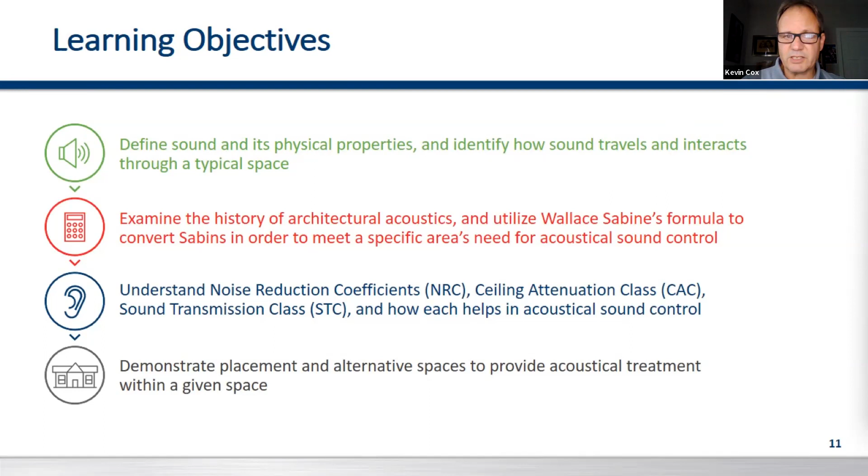We're going to look at noise reduction coefficient, ceiling attenuation class, and sound transmission class. And last but not least, we're going to look at the ABCs and demonstrate placement in alternative spaces to provide acoustical treatment within a given space.

Let's look at the characteristics of sound. What makes up sound? And start by doing a definition. So acoustics has a lot of connotations and a lot of meanings. That first one, a musical instrument without amplification, typically guitar, fun around the campfire, but really not the definition we're trying to drill down on today. Now, the branch of physics that's concerned with the properties of sound, that gets us a little closer. But for today's purposes, it's really the properties or qualities of a room or building that determine how sound is transmitted in it.

So sound or a sound incident is just that. It's a disturbance or turbulence that passes through a medium in the form of longitudinal waves from a source to a receiver, causing the sensation of hearing. Now, this medium doesn't have to be the atmosphere, like sound waves coming through your speakers and through the air. It can be a fluid, a gas. We know that sound waves travel more rapidly underwater, hence sonar.

This is going to age me, but when I was a kid, we had these wooden sticks. They were about 3 foot long. We called them a yardstick, and you could put one end of it in your ear and tap on it, and you would hear that sound within the wood before you would hear it any other place. And the reason is that sound travels more rapidly the denser the molecular composition of the medium it's traveling through.

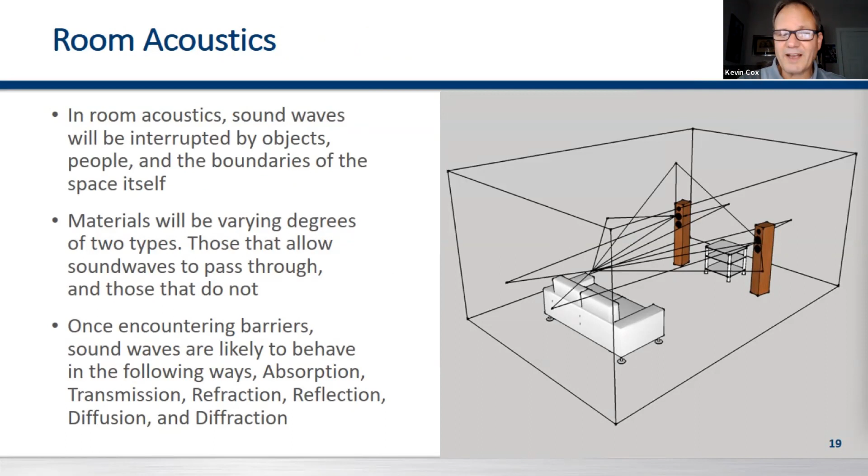Now, once encountering a barrier, sound waves are likely to behave in the following ways: absorption, transmission, refraction, reflection, diffusion, and diffraction. So absorption is basically when the sound hits an obstacle. Some of that energy is reflected back, as you can see, but some of it is lost molecularly or transferred into the barrier itself. That lost energy is said to be absorbed. Now, the sound wave itself, thickness, porosity, hardness of a material, are all going to affect the amount of absorption of that obstruction.

Transmission. This occurs when a sound wave is carried through an obstacle, through vibration, and re-emitted on the other side. So we know that some of it's absorbed, but anything we can hear on the other side, in this case it looks like a partition, we say is transmitted through that obstruction. Now, these can be airborne, structure-borne, impact-borne, but anytime you can hear a sound move from one side to the other, that's considered a transmitted sound.

Now, refraction is a variation of transmission. That's the bending of a sound wave, kind of the turning either up or down, depending on the angle and the sound incident itself, and the different compositions within that obstruction. In room acoustics, we really don't have a lot of ways of controlling or preventing this, but it is a phenomenon that happens, so we did want to include it in our presentation today.

Reflection. This occurs when the wavelength of the sound is smaller than the obstruction it's hitting. Sound waves hit every side of a room and start to bounce back until the sound energy is reduced to 0. Now, diffusion: we know that usually when a sound wave hits a flat obstruction at whatever angle, it's going to be about a mirror image between its primary ray and its secondary ray. However, there's a splaying of those rays, especially off a flat surface, and we call that diffusion, and this is another way that sound energy dissipates itself to 0.

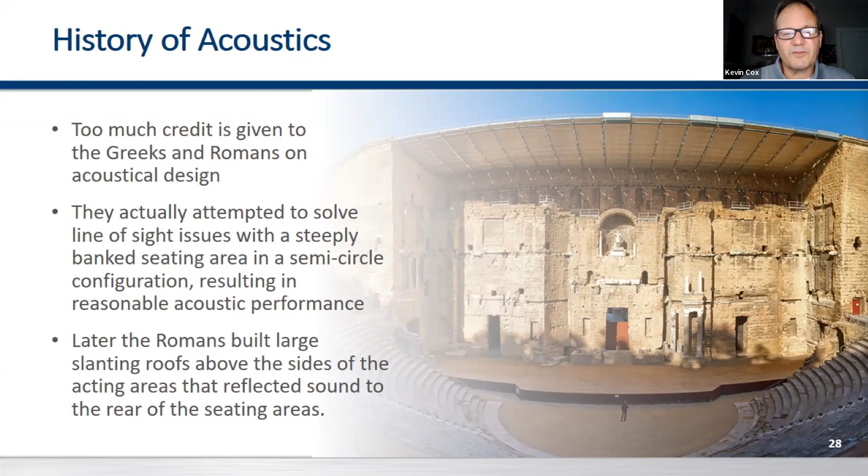Later on, the Romans built large slanting roofs that were shading devices. And once again, by mistake, they pushed waves back out into the farther spaces of the auditorium, creating some of the first reflectors. There really isn't any reference of architectural acoustics until the 1st century BC by Vitruvius in a book called De Architecture, where he describes echeia. Very much like the acoustic guitar that has a resonance chamber, these large vases were placed around the outsides of auditoriums, and that resonance chamber would give some reverberation, some richness of sound, because there was no reverberation. These sounds were just single pass and moving out.

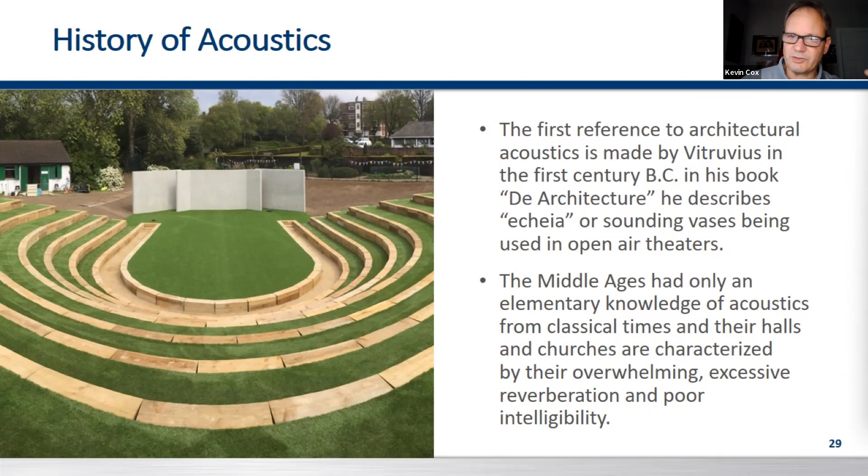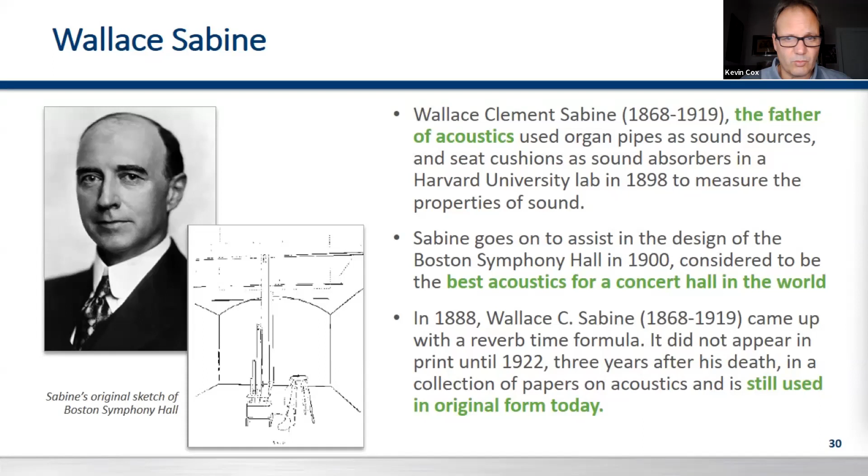So Sabine was able to determine through the experiment with these cushions and these organ pipes a definitive relationship between the quality of acoustics, the size or volume of a chamber, the amount of absorption, with the most important factor being reverberation time. Now we know from previous slides that sound produced in a space will bounce off and reflect, gradually losing energy. As these sounds collide with each other, the phenomenon is known as reverberation.

Now, too much reverberation is going to have a negative impact on speech intelligibility, and too little will reduce the warm, rich sounds that we normally hear, like in an orchestra hall or like in the Boston Symphony Hall. So Sabine's formula was RT60, or reverberation time 60 dB. And basically what it's measuring is a 60 decibel drop in sound incidence, and what that time is in seconds. So in this example, it's 100 to 40.

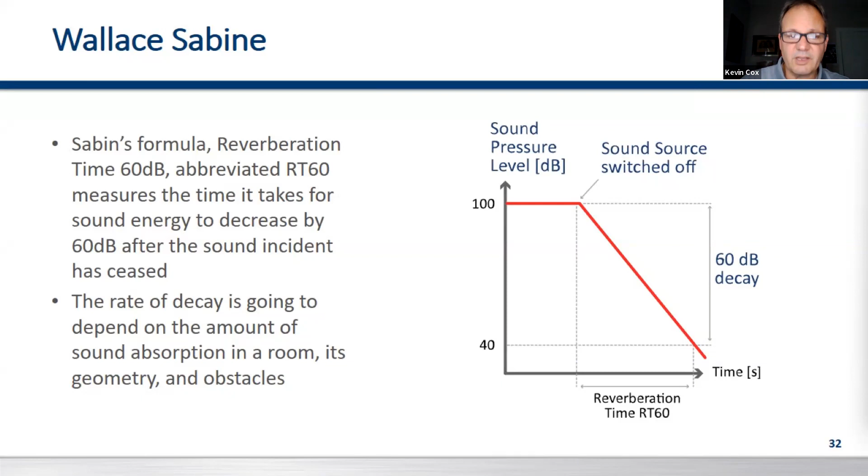It doesn't have to be 100 to 40. It could be 120 to 60. It could be 90 to 30. My math's a little off. But it's basically the time it takes for a 60 decibel decay to occur, and that time in seconds. That rate of decay is going to depend on the amount of sound absorption, the sound incident, the room geometry, and the obstacles that are in that room.

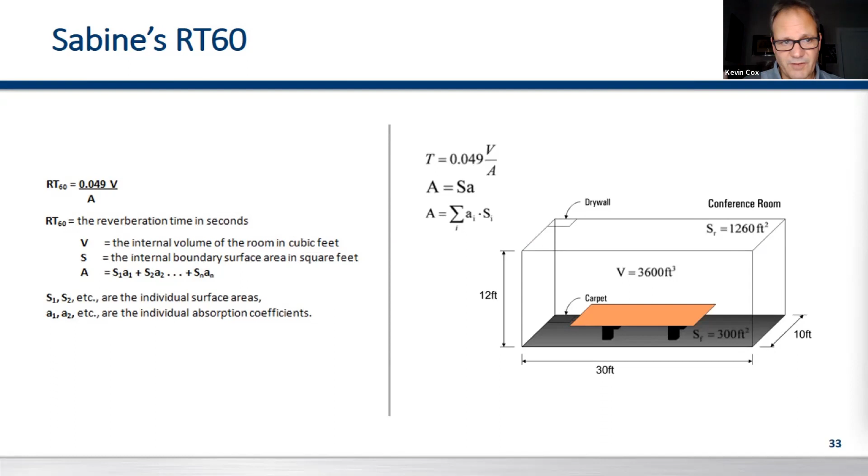Now, different building materials will have varying amounts of acoustical absorption. If we're treating a space, the higher the absorption, the less footage will be needed. But because of the algebraic relationship, we can remove one variable. So when we looked at that model before, we were trying to model a room's RT60, what it was going to be in seconds. But if we know the RT60 that we want to get to, and we know the volume of the space and the size of the walls, we can figure out that absorption coefficient, or how much absorption is going to be needed to treat that space in Sabins.

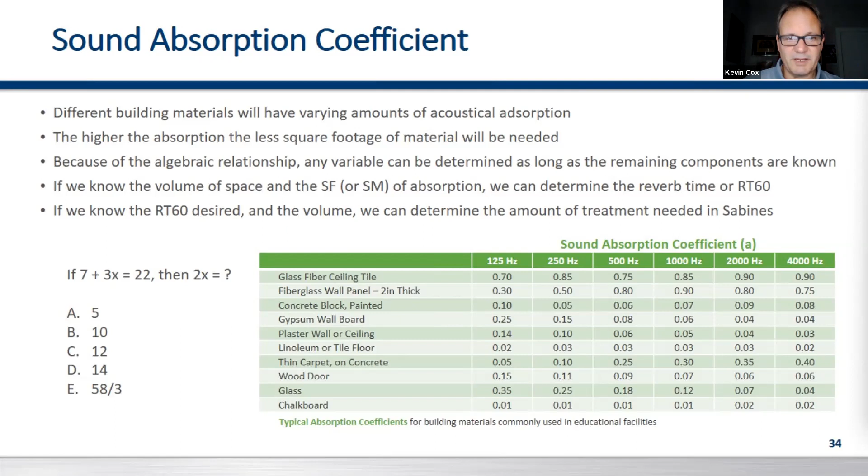Now, generally speaking, for general purpose, a 1.5 to a 2.5 second RT60 is about what we're looking for. Larger auditoriums, it's going to be a little higher than that. Smaller spaces, education spaces, libraries, medical, probably a little less. When I worked in another lifetime for USG, they had an anechoic testing chamber with all these foam things coming off the walls, and you would go in there to test a sample, and it was almost like you were holding a shell to your ear, because you could hear the blood rushing in your head. It became uncomfortable. It was so devoid of sound, so acoustically dead.

The other side of that is when you get to 3.5 seconds, you get a lot of echoic effect, a lot of reverberation. You get to 5.5 seconds, you really start to lose speech intelligibility. There's kind of a bit of a communication breakdown because it's so echoic, and so forth and so on. Well, God bless the internet.

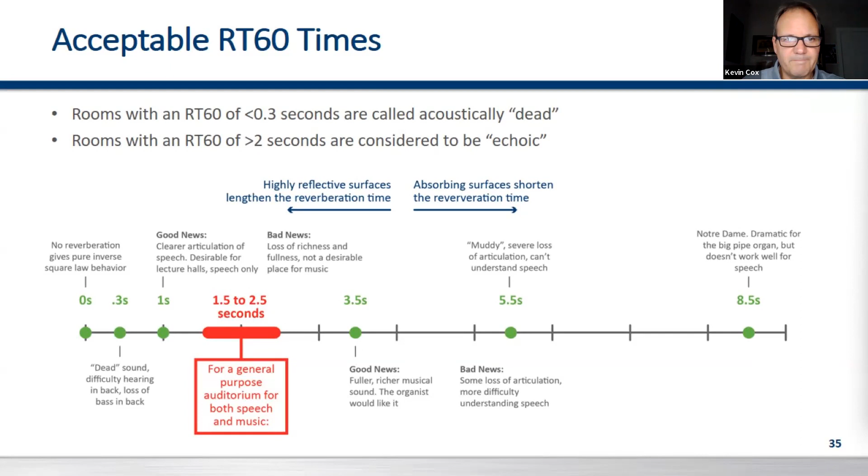This is public domain, so anyone can use one of these, but there's a lot of reverberation calculators you can use. You can see the width times height times length to get that volume in feet or meters. Your walls, floor and ceiling, what those spaces are, and then a number of hertz that you can test across, and this will give you a modeled RT60. It's kind of an acoustician in a jar, or you can work it backwards if you want to see how much treatment a room needs.

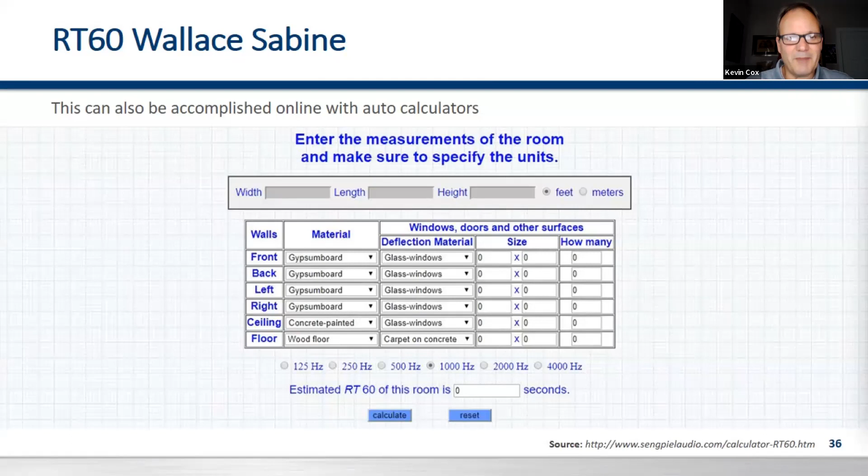And once again, these are the hertz across the room. The voice hertz are that 125 to 250 range, if that's what you're working with. But these are all over the place. And like I said, they are public domain, so you're not doing any copyright infringement by using them if you wanted to model spaces. So we looked at these spaces and how they react.

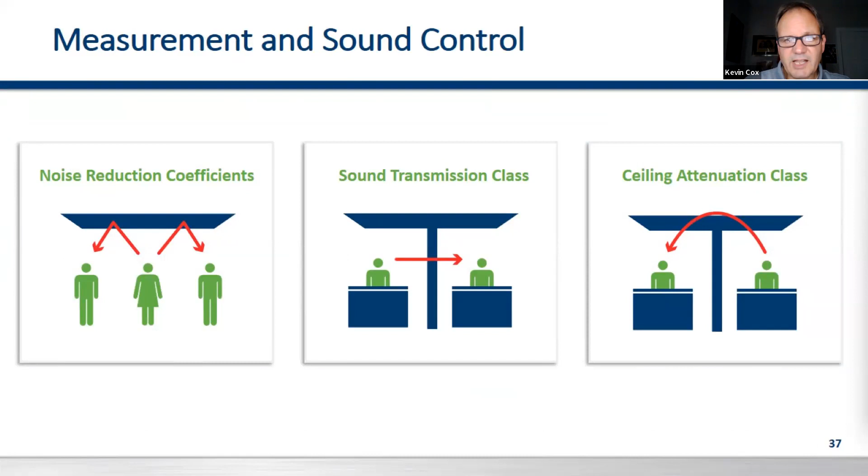And now let's look at materials. More specifically, noise reduction coefficient, sound transmission class, and ceiling attenuation class. And we're going to take those in order. First is noise reduction coefficient.

Anyone that's opened up an acoustical ceiling catalog or acoustical wall panel catalog has definitely seen NRC, or noise reduction coefficient. And what that is, is a scalar representation of the amount of sound energy absorbed as soon as the sound incident strikes a surface. It's represented by a decimal or percentage, and it's rounded to the nearest 0.05. So an NRC of 0 would indicate a perfect reflector or perfect reflection. An NRC of 1 would represent perfect absorption, or 100% of that sound energy upon first pass is being absorbed.

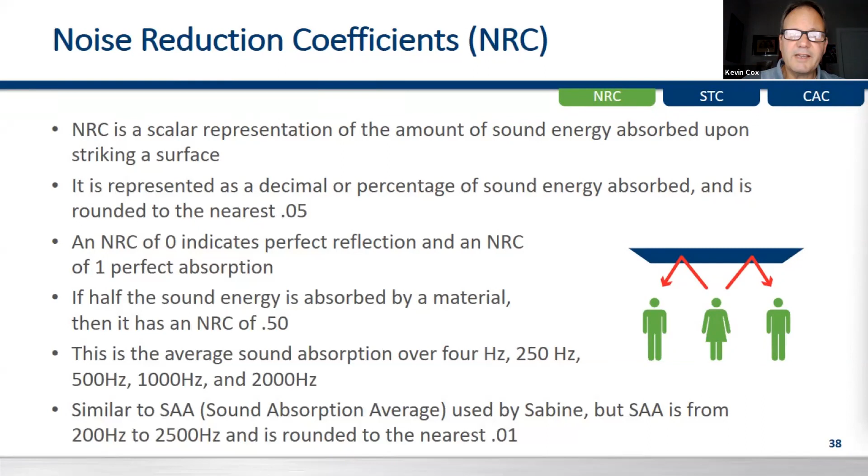If we had something with an NRC of 0.50, that would mean that 50% or half the sound energy is being absorbed upon first pass. This is averaged across 4 hertz: 250, 500, 1000, and 2000. And once again, it's rounded to the nearest 0.05. We do have a sound absorption average in that anechoic chamber. They were drilling down to get a more exact reading, and it was an SAA. It's very similar to an NRC, except it's a wider band of hertz. It starts at 200 and goes to 2500. And instead of being rounded to the nearest 0.05, it's rounded to the nearest 0.01.

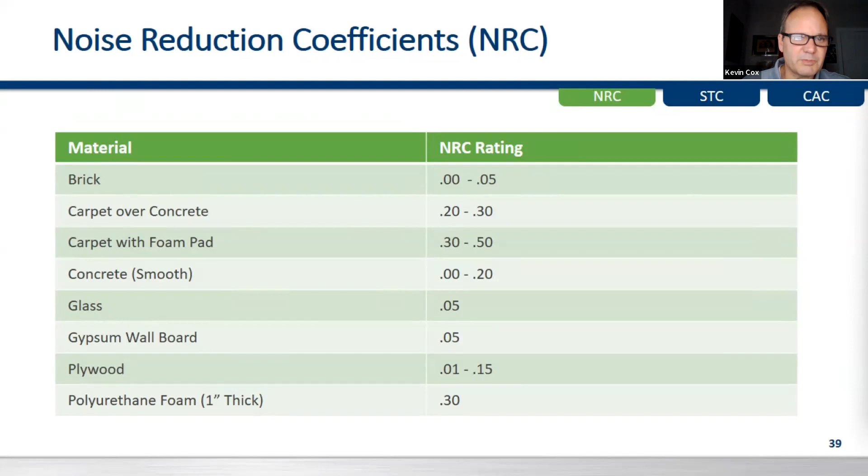So next is sound transmission class. So we know about transmission of sound passing through an obstruction, and what STC measures is the reduction of decibels from one side of an obstruction to the other. Now the word deci is meaning base 10. So 10 dB up or down is a physical and literal halving or doubling of the sound wave itself. And then the last part is by its inventor, Alexander Graham Bell. And Bell was actually involved so much in sound because he was going deaf, and that's why he wound up with the telephone and the phonograph, and you guessed it, the decibel.

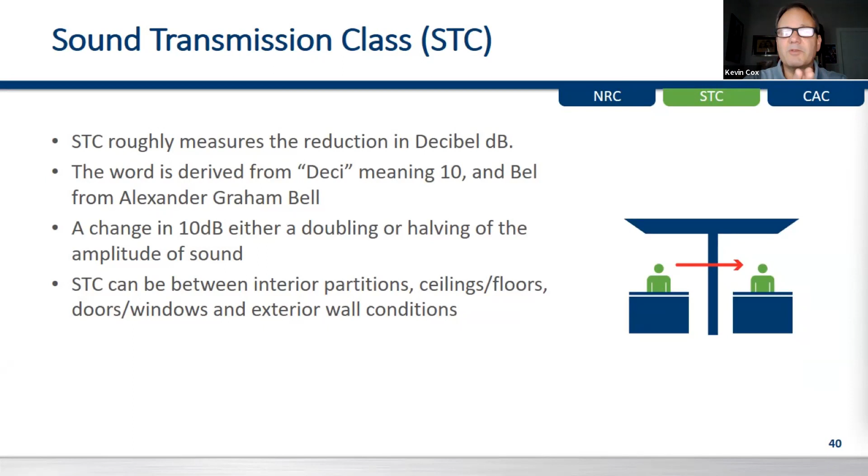As you get higher and higher, it becomes more cost prohibitive and a little trickier to get something that's close to soundproof, but it's not impossible. But those ranges run roughly from a 25 where sound is passing through pretty readily to 75 and 80 where you're getting something that is almost soundproof. And that's sound transmission class.

Last but not least, the ceiling attenuation class. It's essentially STC, and this came to us from the Acoustical Ceiling Manufacturers Association, CISCA and some of those. But it's basically the same measurement. It's the decibel drop, but it's a 2-pass test. With the advent of walls not going to ceilings, going grid to floor instead of slab to slab, and open offices, there was a loss of privacy. So what this measures is the decibel level on one side, going up, hitting whatever that structure is above, and being measured in its adjacent space.

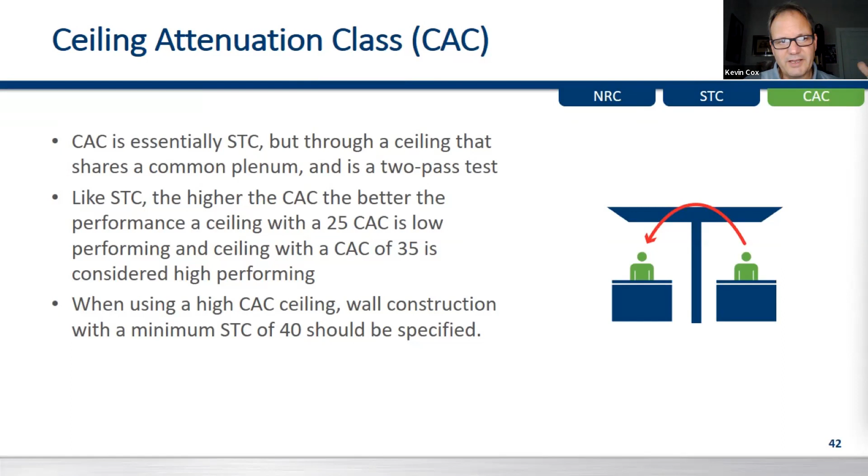And once again, if you have a 60 decibel incident on one side and you measure a 20 on the other side, then you're going to have a ceiling attenuation class of 40. And that would be very, very high performing. So this is also a very tight measurement like STC, where 25 is low and 35 is high. The one thing we want to know is that if we are specifying a higher CAC ceiling, we want to make sure that the wall specification is going to be at least 40 plus. You don't want to spend money in the ceiling piece if you're going to lose that sound privacy through the walls. And then there's a quick kind of guide on the side, showing the CAC going up and over, the STC passing through the wall, and then the NRC being absorbed up into the ceiling.

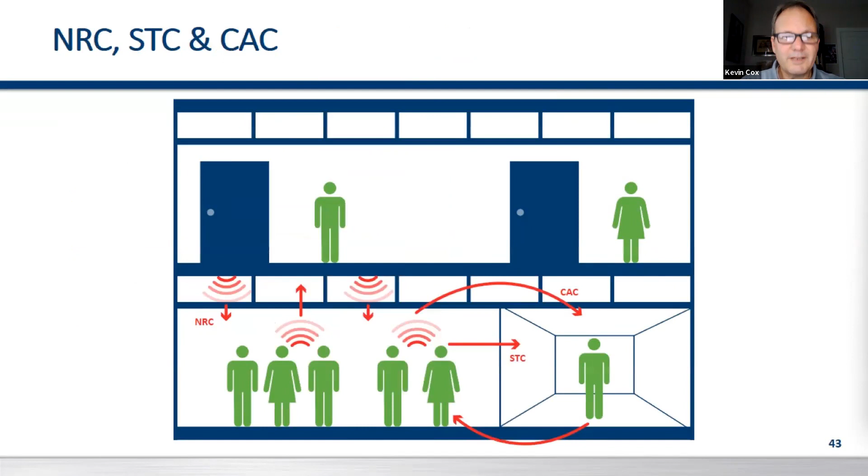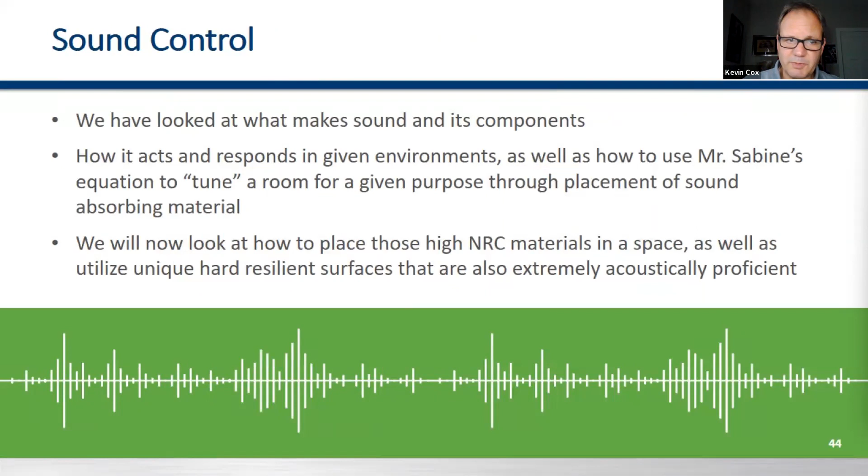We looked at sound control and its components, what makes it up, how it interacts within a given room, and how to use Sabine's equation to literally tune a room for a given purpose. Now we're going to look at the ABCs and how to place these high NRC materials in spaces, as well as unique, resilient hard surfaces that are also acoustically proficient.

So I mentioned earlier acoustic ceiling tile. Acoustic ceiling tile has really been the go-to for decades. Very, very easy, very, very convenient. It's actually made from a byproduct of slag. The tiles themselves are mineral fiber. So they'll take the slag and spin it like glass, like fiberglass, into these long fibers, press that into a mat, paint it with an acoustically transparent paint, and then perforate it and fissure it so there's places for the sound to go to, for it to get caught in.

And it's very, very simple to install. It creates this nice plane and interstitial space for all the MEP trades to be accessed and yet hidden out of sight, usually 2x2, 2x4. And if you have a space where your ceiling height is 8-9 feet, just treating one plane with acoustical ceiling tile is usually enough to control reverberation.

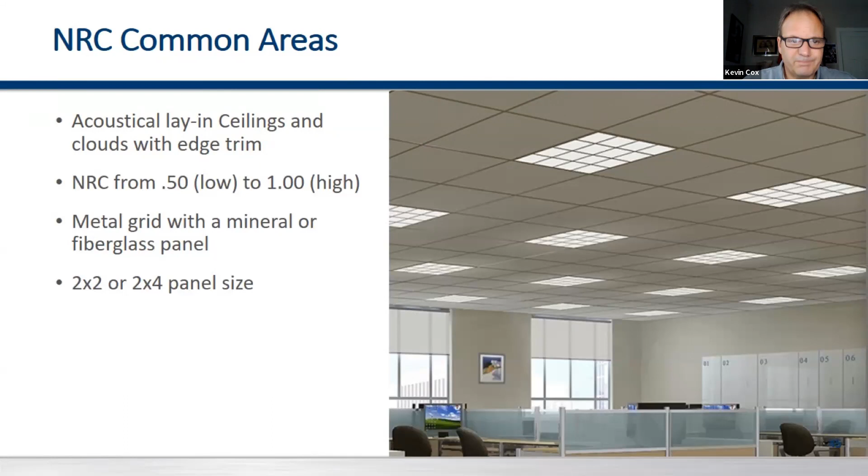Now, if we want to get a little bit more flexibility, we can work with geometry, with shapes, with textures, with colors. Floating clouds or fabric wrapped sound panels. The nice thing about sound panels, these are usually chemically hardened edges. They're wrapped on one side, the visual side, but they're absorptive on both sides. So what that means is that you can use less panels and still get a 2-pass effect. Unlike the ceiling attenuation class where you're measuring the decibel, we're actually getting absorbed in the top.

So you get that first pass coming up. Then anything that goes off of structure and bounces down, you can count on getting caught on a second pass on the backside. So what that means from the design perspective is that we can use less material and still get the same amount of absorption because we're getting that 2-pass effect.

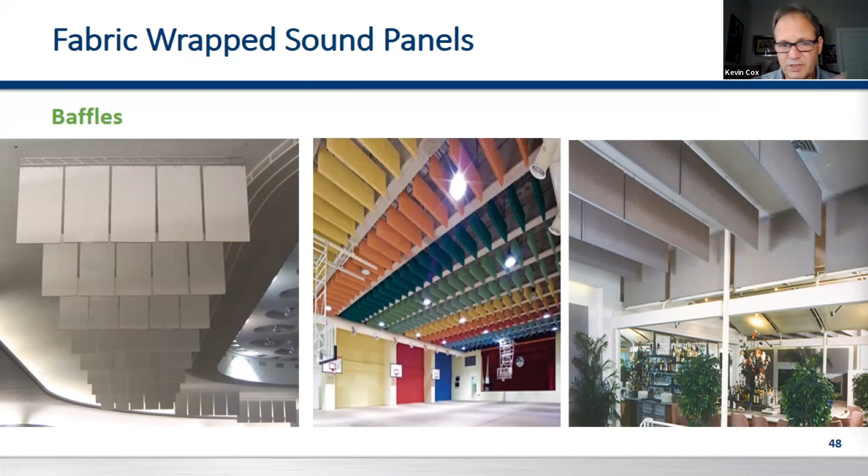One of the rules of thumb with baffles or banners is however deep they are, however long that drop is, is generally what we want to space them at. So if you have a top banner and it is closer than the drop, you're really not going to be utilizing the top part of that absorption. If we spread them out and get them farther, then we're not utilizing the square footage within the space. So we're circling back around.

So acoustical ceiling tile in its basic form, this fissured and perforated pattern, is pretty cost effective. But once you move away from that standard perforation, if you want to get a larger monolithic or smooth surface, prices double or triple. So your upfront cost goes up exponentially. They can stain, break, fade over time. Generally speaking, the mineral fiber versions have a maximum range of 70 to 80 NRC. To get higher than that, you'd have to go to spun fiberglass.

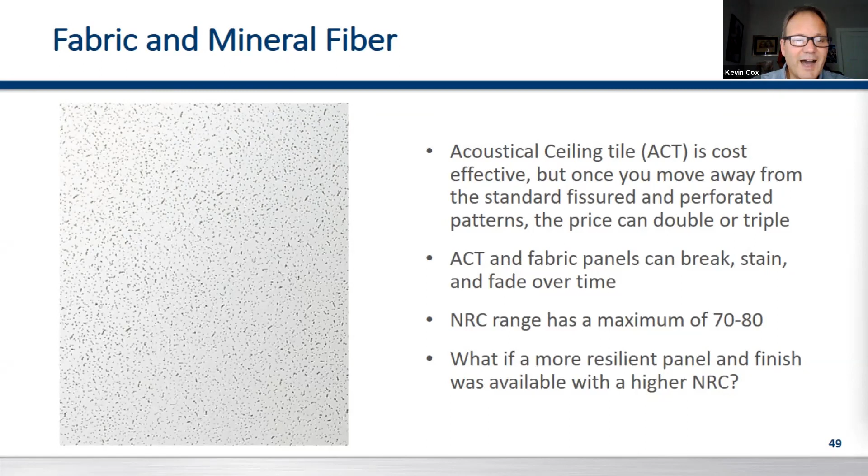So, what if there was a more resilient panel and finish that was available with even a higher NRC? Well, I know this is going to come as a shock to everybody, but the metal guy is touting perforated metal acoustical panels. It does seem a little counterintuitive because a solid metal panel will reflect sound. However, a perforated or micro perforated panel allows sound to transfer through. Now, once we transfer through, we need to catch it on the other side. But by doing so, we can create a very, very resilient surface with a very high, almost perfect NRC.

So like I mentioned, the ABCs of acoustics. So when I say ABCs, what exactly am I talking about? Well, with metal, there's absorption, there's blocking, and there's covering. So like I mentioned, we can perforate metal panels and allow sound to transfer through, but then we need to catch it with something. One of the ways that we can do that is with acoustical fleece or SoundTex.

In a lot of these, when I do these architecturally, they don't want you to mention product names. The thing is, the only people that really make an effective acoustical fleece is Freudenberg, and it's called SoundTex. It's very much like Kleenex or Coke. The product name has become synonymous with the actual acoustical fleece, because it's used interchangeably, because they're really the only one.

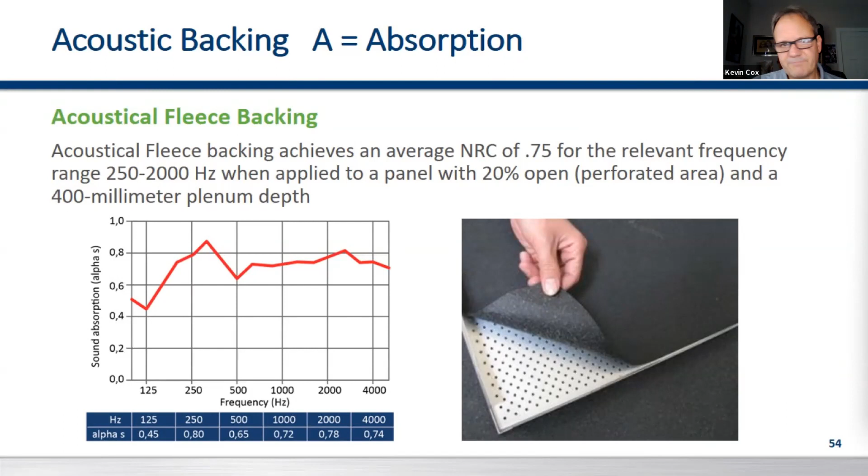Now, that's not perfect absorption, but you're not giving up any of that interstitial space by using an acoustical fleece. It doesn't particulate. You don't have to worry if you're ever going to turn any of these sideways about it falling out, because it is adhered to the panel. You're getting some very, very good acoustical performance without utilizing or losing any space that you're utilizing for duct work, for communication, for electrical, and so on.

This is a product I like a lot. This is CFAB, or cellulose fiber acoustical bat. It is highly recycled and highly recyclable, in a 2x2 or 2x4 or 4x8 kind of semi-rigid. And what it is, it's actually recycled denim and polyester. So it seems like it's a flashback from the 70s, but they treat it in such a way that it passes NFPA 285. So it's suitable Class A for all commercial building.

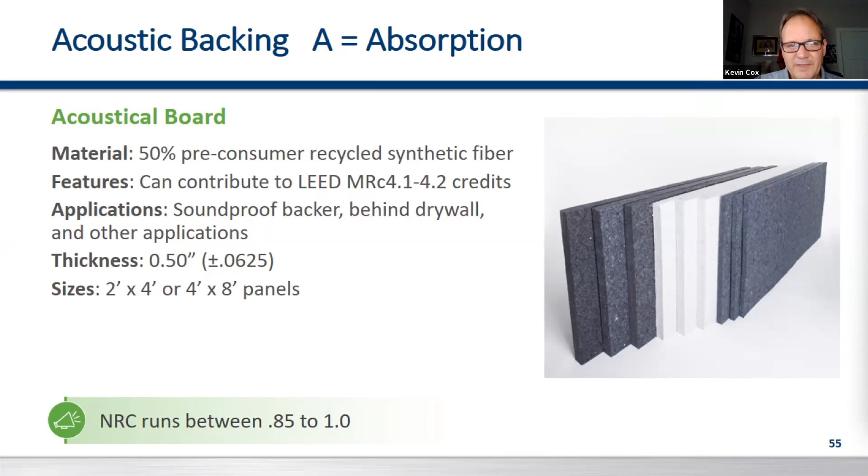If you get a 2-inch, you're pretty well insured to get a 0.85 to a 1.0 NRC, depending on how much perforation you have on the metal face. And also, it's not an irritant. So when people are installing these, touching these, you can touch your face. It's not an irritant like fiberglass. You don't get all itchy and sweaty or break out in hives. And it's also a very, very green product and very planet friendly. So that's CFAB.

The most common, our good friend fiberglass, usually a very bright color, yellow or pink, depending on the manufacturer. So we have to encapsulate it or put some type of scrim or felt or black facing in front of it so you don't see the color through the perforations. Most commonly, it's a 1.5 to 2-inch density. You can still get a pretty high NRC, 0.85 to 1.0, but it is an irritant. And it does not recycle well. And once it gets wet or collects humidity, it loses its acoustical performance. However, it's extremely cost effective. So it is widely used throughout the industry for acoustic backing to get that A, or absorption.

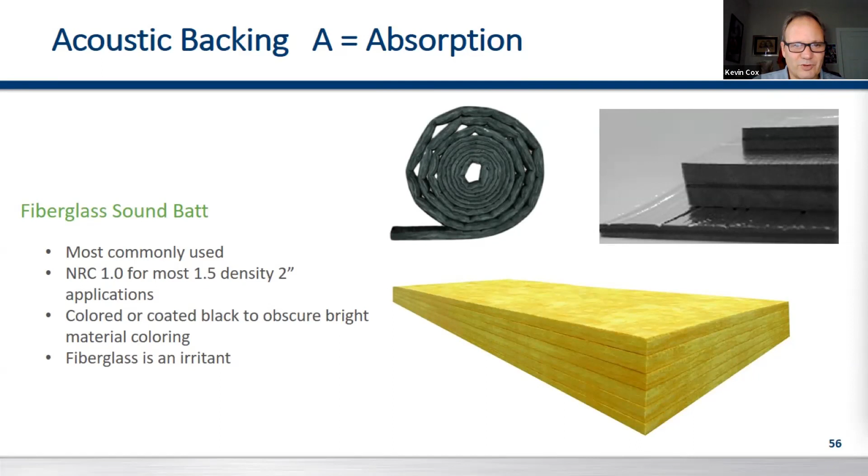If you've ever had anybody that has a champagne taste and a beer budget, another way to drill down on something where you can get acoustical performance is by the use of acoustical duct liner. Now, this is still basically fiberglass, but pressed. However, because they don't call it an acoustical batt and they use it in large duct trunks to reduce wind velocity, it's very, very cost effective.

It comes in basically 100-foot or 50-foot rolls. They're the same size. It just depends whether you're rolling out 1-inch or 2-inch. It is generally a 1.5 density per cubic foot, and it already has that black facing on it. So once again, you're not going to be able to see it looking through the perforations when we're looking up or down on an assembly or through it on a wall assembly.

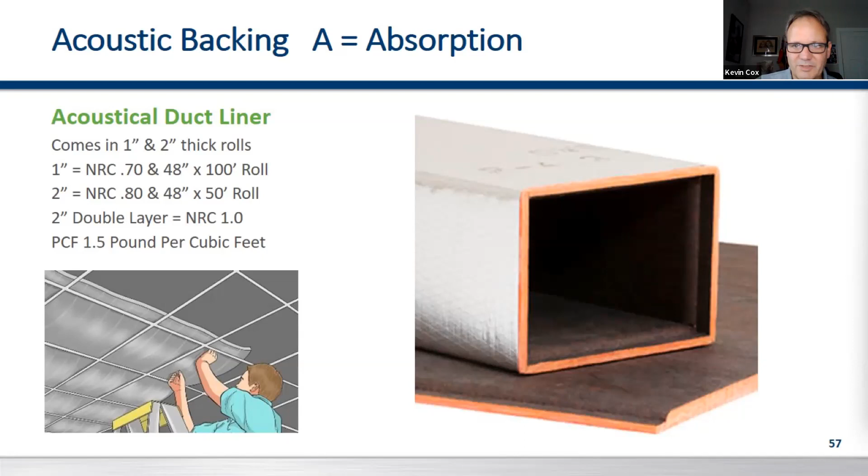So anything you can do with a mineral fiber panel, we can do with aluminum. The reason I say aluminum, certainly we can do it with steel, but perforating aluminum, it doesn't rust, it doesn't corrode. We don't have any issues with that. And also aluminum, as far as being planet friendly, is one of the most green materials we have. This is true because it's more cost effective to actually recycle aluminum than to go out and try to get bauxite to mine virgin material.

So mineral fiber, although it's made from a recycled material, at the end of the day, they really don't have a good way. They grind some of it up and try to reintroduce it into some of the slurries, but it doesn't really take. More often than not, the reality is that when this mineral fiber is done, it's going to wind up in a landfill. It's expensive to try to recycle it, and the processes aren't quite there yet.

However, when we're looking at metal or aluminum, it's more cost effective. So that aluminum has a value. The idea that someone's going to go in there, pull it down, and recycle it is a very high probability because it's more profitable to do so. So it's one of the few places that capitalism actually drives a little bit of green building, which is kind of a nice effect for it.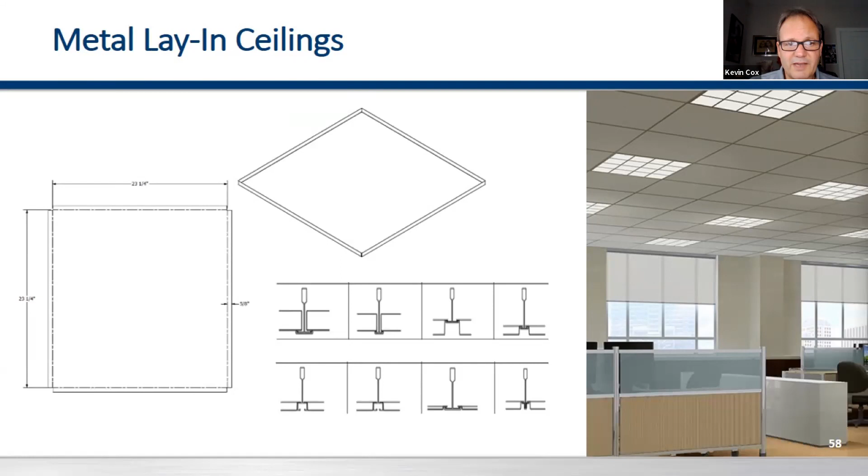But once again, any of the bolt slots, the reveal edges, the square edges, narrow line, just simple lay-in, anything you can do with a mineral fiber panel, we can do with an aluminum panel perforated, and we're going to get a higher performance out of it.

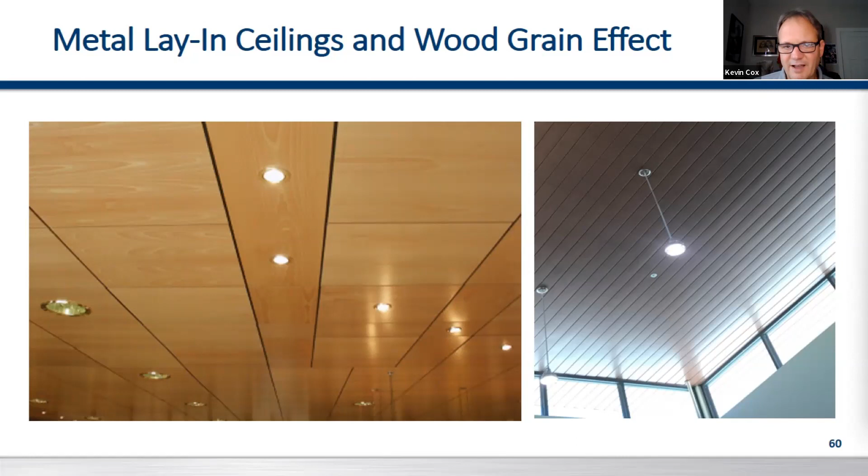So we can carry these through ceilings, through walls. This is solid panels. On the right side, though, is micro perforated with Soundtex. So they can be acoustical units, or they can be simply just eye-catching, warmth-bringing type units that, once again, we still get all the benefit of recyclability, of second use, second life, and the look of natural woods.

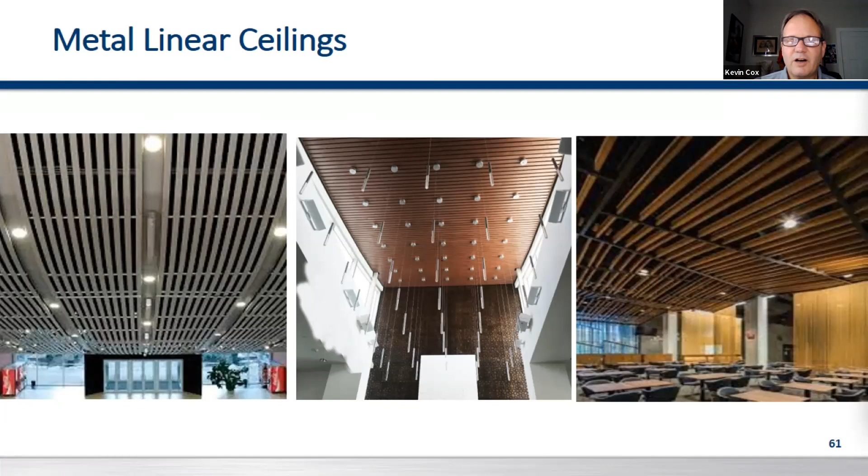Linear metals, they don't really do this in mineral fiber. This is something that's specific to metals. It used to be very, very popular, 60s, 70s, 80s, 90s to some degree, kind of lost favor. But once again, with the advent of faux wood finishes and wood surfaces, linear metal has come back as a very, very viable solution, as have metal baffles and beams with the wood look that you see over on the right. So we have that kind of warm, natural feel in the center, a very neo-industrial look on our left, and then a split look beams and baffles on our right, all done with 032 aluminum.

Not to mention metallic finishes, mill finishes, coateds. We can work with zincs where we grow an anodic layer. We actually grow crystalline on the surface of the panel itself. It's not a coating, so there's no chance of it delaminating or coming off. Coppers, bronzes, natural metals, zincs, very, very popular, both interior and exterior today. So as we delve into metals, or metal panels for interiors, your options are pretty unlimited.

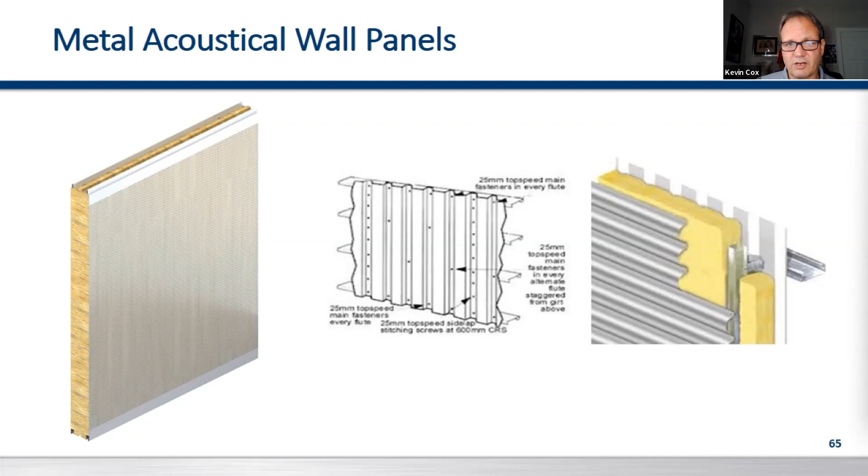So wall panels, we can hook them on the walls. We can make entire walls by just creating a girt and keeping the cladding off an inch or two, putting some type of absorber behind that. We've looked at absorbers, a CFAB, a regular fiberglass, spun glass insulation, or Soundtex. Any one of those is acceptable. And literally you can make all of your walls absorptive if need be, if you have that type of volume and want that type of sound control or RT60 calculation under a second or so in your space. These can be modular. Once again, with the modular pieces, we can work with geometry, shapes, colors, texture, giving you all types of flexibility simply by using metals.

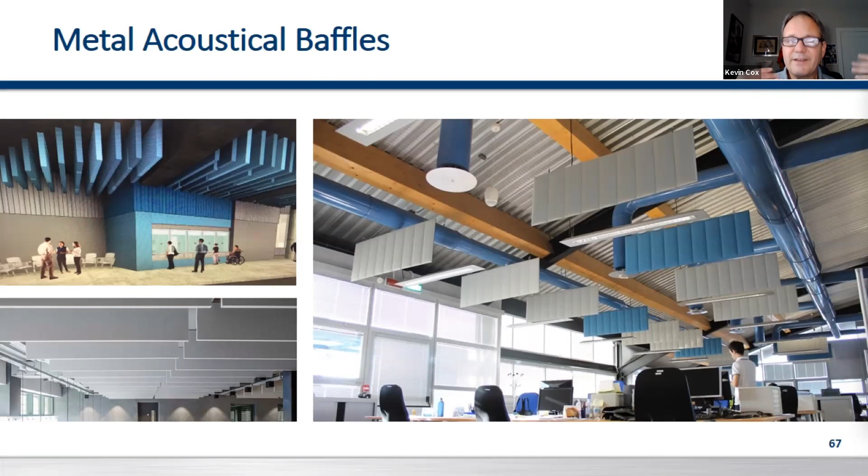Baffles, very simply, we can do the same things that you can do with all the fabric wrapped or chemically hardened edge baffles in metal. We're not really following our rule of thumb as far as drop and spacing there on the big picture, but those are also visual elements. And if you notice, the ceiling above it is actually fluted, and there's an acoustical bed above that. So you're catching sound both horizontally and vertically within this learning space.

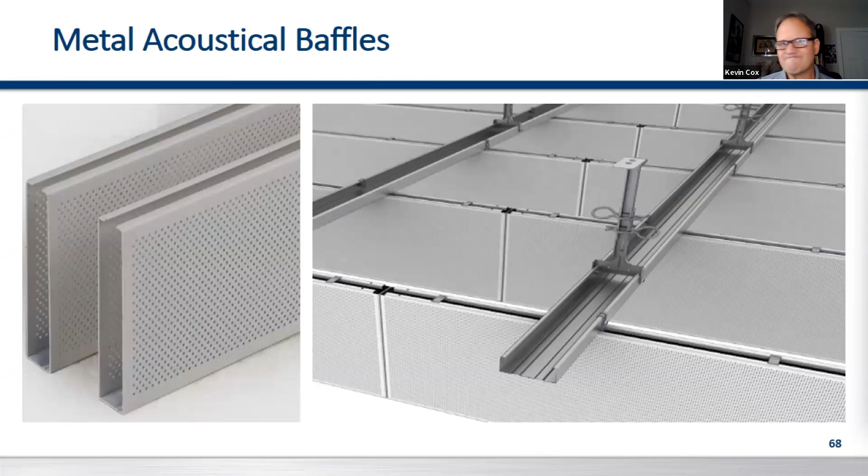There are systems that are actually modular, change fills, change amount of absorption within by adding blades, subtracting blades. And we can do this over a weekend. So we're not really disturbing the space. We're not disrupting the folks or the flow of the space within it.

This is out at HC or H. Councill Trenholm Technical College in the campus in Montgomery. And they had a lot of hard spaces. So they started putting in tricolor and bicolor wall claddings that were micro perforated with a 1-inch sound back behind it, just to kind of bring down some of that noise. They did that throughout this building, both in break areas, in like the automotive service centers where they teach people how to work on cars, how to work on diesel, and so on. So they could bring some sound control into these more industrial spaces.

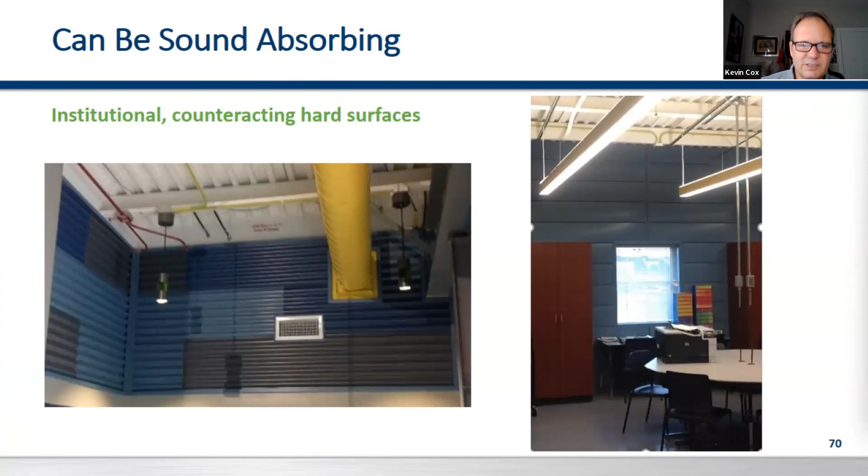The people would fill the space below it, and they would induct Hall of Fame athletes and do these things. And they went to use it, and it was so echoic. It was 7.2 or 7.5 reverberation, RT60. You couldn't really understand what was being said.

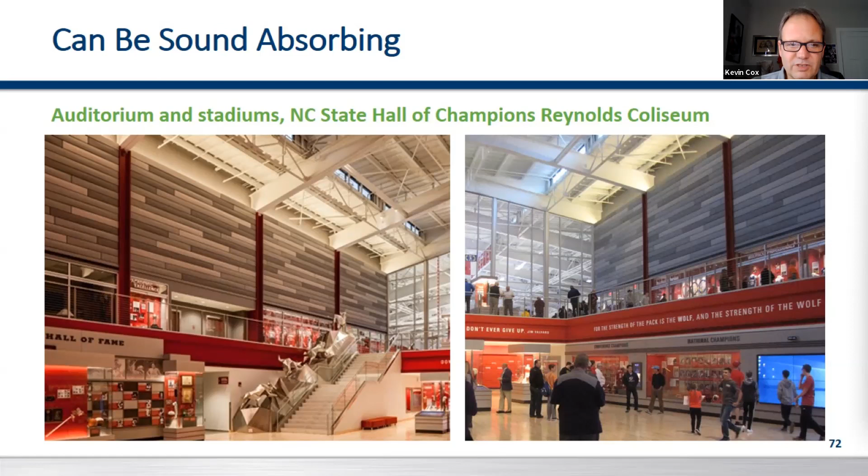If someone did get one of those panels down, it's probably about a 3-foot interstitial space and then more concrete. They'd be a little disappointed, but the acoustical benefit helps counteract all those hard surfaces. So if there is a riot, if there is an uprising, if people need to talk, whether it's face-to-face or on the radio, communication can take place much more effectively and much more readily.

Pools and caustic environments, whether it's chlorine air or just simple high humidity, metal is going to be your best bet. Perforated metals with PVDF finishes can take on chlorine air, can take on salt air, can take on high humidity without chalking, fading, or deformation. And then it's actually a very specific fill when we're in a pool or an aquatic center or aquarium or anywhere with high humidity.

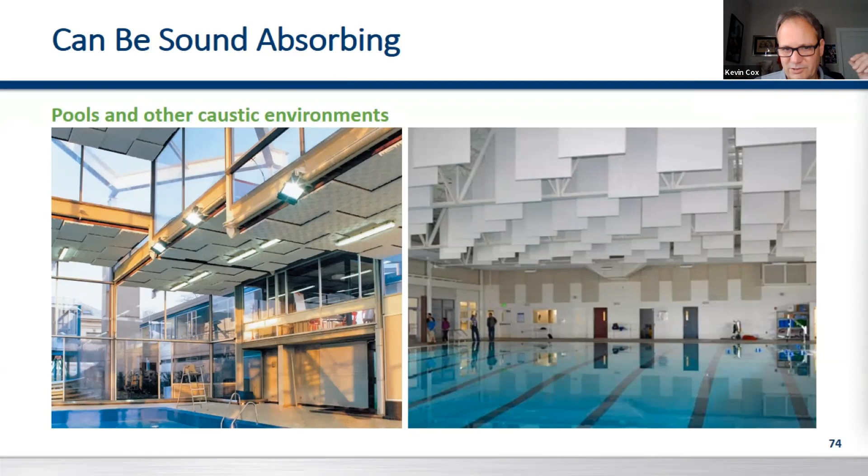Also industrial and warehouse spaces. We have a lot of processes going on, equipment running. The only thing when we get to these spaces is, generally speaking, if you look at both sides, they're usually framed out. And what that is, when you perforate metal, obviously you're taking a piece of it out. So it's losing some of its integrity as we do that.

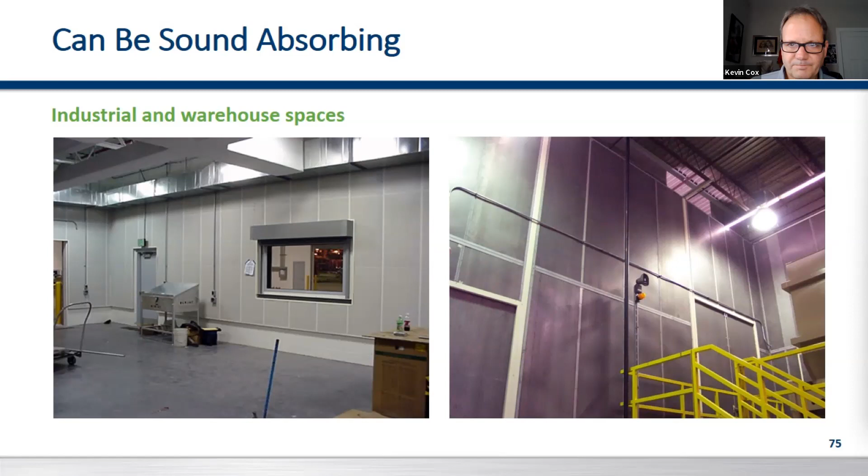By keeping it perforated in the center only, we're still allowing sound to pass through, but we're giving it more impact resistance. We're leaving the integrity of the metal around the perimeter. So if a cart hits it, if it has some type of impact, a lot more is going to be going on that's rough and tumble in an industrial space or a warehouse space than it would be in, let's say, a Class A office space. And this is how we treat those areas. So that's the A of the ABCs.

The B is blocking. So we know that perforating, we allow sound to pass through. But if we don't perforate that and we leave it one continuous plane, then by putting some type of undulation or profile in it, we can actually block or reflect sound energy. So the one on the left here, that's a dentist office there. I believe it's going to be an A.B. Martin install, but it's a waiting room on one side.

They have a wall, and basically the higher frequencies, metal is an excellent reflector and blocker of. Lower frequencies, bass sounds, like I was trying to do earlier, those are usually mass or block, but by combining the two, you get a very wide spectrum of hertz and really good isolation or speech privacy between the two spaces. The one on the right is Rock Outdoors in Lexington, North Carolina, and their accounting department is upstairs behind that wood decking and then the gray metal cladding.

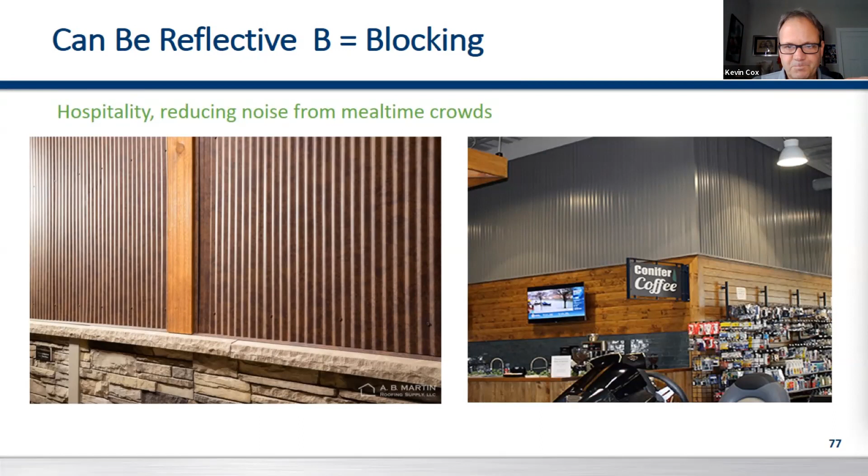And once again, that cladding is adding a layer of reflectivity because you have basically what is a retail space for fishing boats, camping outdoors, people milling around there, and then office space on the inside. And we're using that as a blocker. Another part of the blocking could be reflectivity.

This is a Shake Shack and a Blaze Pizza. These are both in mall areas. So when we get that deep profile, we have no perforation. That sound is actually going to be parabolically reflected out. So we know nothing really attracts a crowd like a crowd. So by utilizing hard surfaces, not perforating them, we're going to use them as reflectors. We can push sound out into the common spaces.

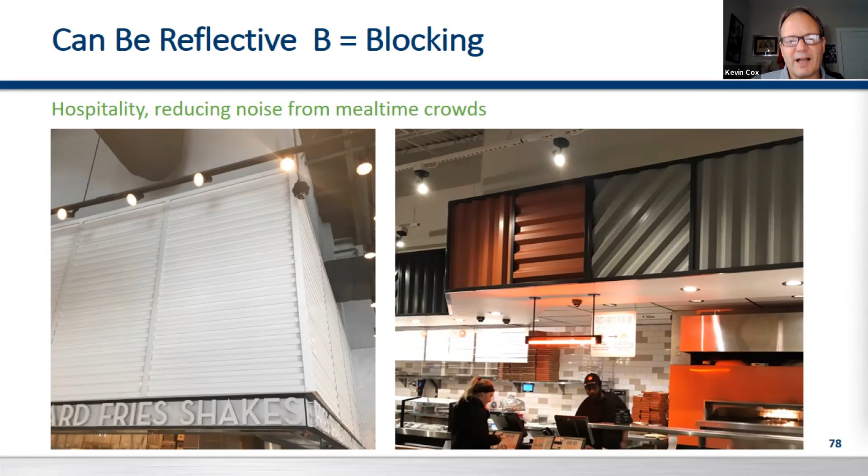So at lunchtime, as these places start to fill up, the noise becomes louder, the decibel rate goes up, and people are drawn to it saying, hey, look at that. Well, let's go get a Shake Shack. Let's go grab a slice of pizza. And that's the B of blocking, or reflecting of sound with metals.

Last but not least is covering. Metal itself doesn't really do covering, but we have a lot of systems that we put together, and these systems are usually accessible, especially ceiling systems. So people can get up into that interstitial space and change out lights, work on VAV boxes or HVAC equipment, what have you. But that accessibility also allows for sound masking.

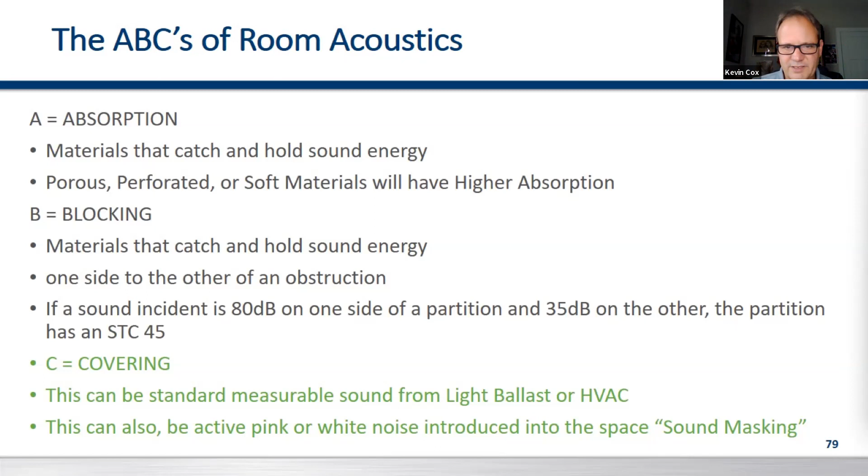Now, sound masking is the introduction of white or pink noise. And when I first heard of it, I really thought that this is a lot of sizzle and not a lot of steak. And I wasn't sure about the technology. Independent research shows that the introduction of sound masking, though, not only creates sound privacy, very much like a noise canceling headphone, which goes in the same sound wave or mimics the wave that's coming in or the exterior noise, thus creating that noise canceling. This does the same thing with speech.

It introduces a pink noise into that space that is the mirror image of the sound wave of speech. Thus, you can hear people are talking, but you really can't understand what they're saying. When the volume's turned up, it actually sounds like just static. But it's supposed to be done at a decibel level where you really can't hear it unless you're really concentrating, almost like a light ballast noise, but one that's tuned to reduce speech intelligibility.

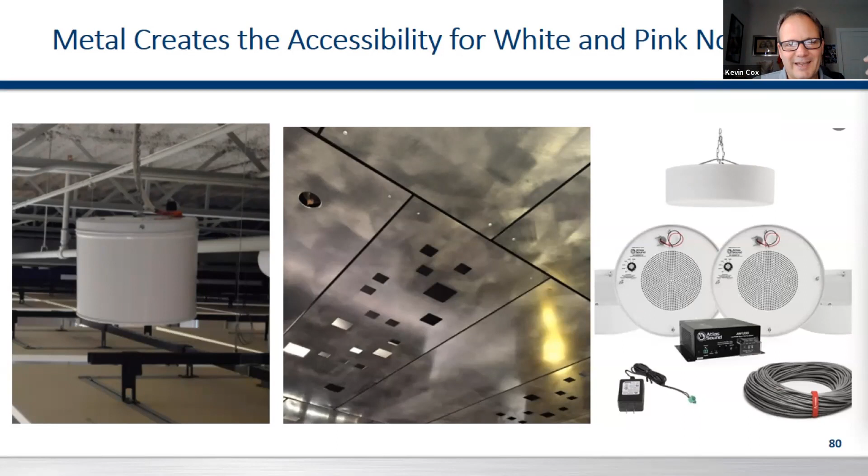Where metal comes in is that it's accessible. So we allow both tuning and access into our spaces, whether they're point accessible, push and pull panels, or whether there's some type of access panel like we see up there in the upper right. We create the access and the entry for these sound generators to be placed throughout a space and thus covering noise. And that's the ABCs, absorption, blocking, and covering of acoustics with metal panels.

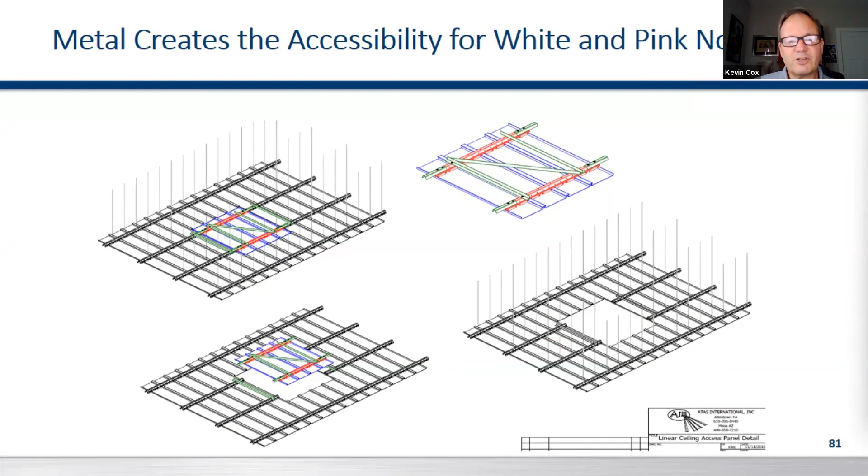So in conclusion, we know that sound waves create all different volumes, tones, pitches, both audible and inaudible to the human ear. That we can use Wallace Sabine's RT60 calculation to determine the amount of treatment needed in a particular space.

I'm choking on iced tea, excuse me.

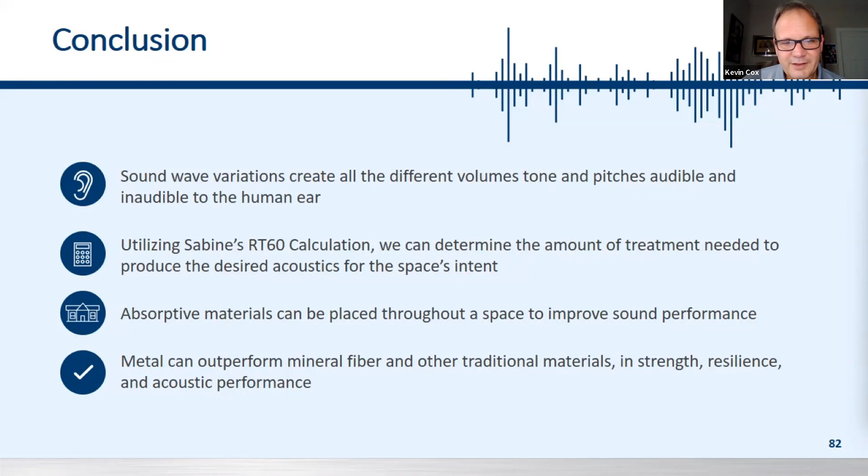Sorry about that. That absorptive materials can be placed throughout a space to improve sound performance. And the takeaway that metal can outperform mineral fiber and traditional materials in strength, resilience, and acoustical performance. And with that, if there are any questions, I would be very happy to take them at this time.